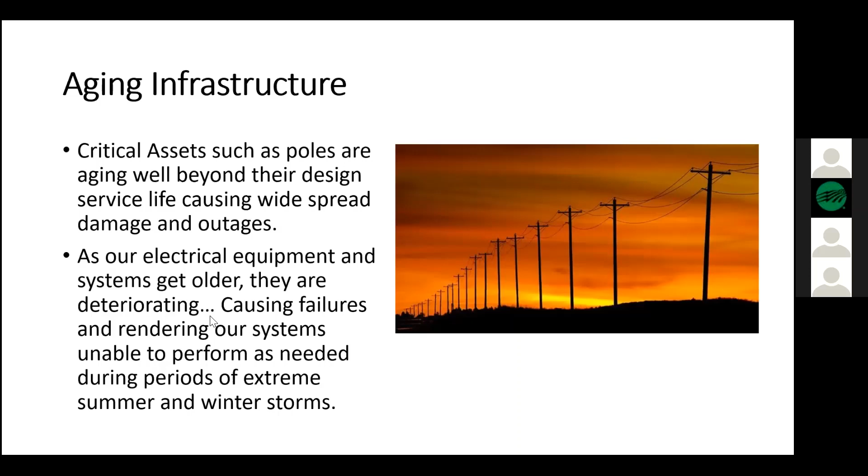As far as infrastructure hardening options, the NESC, that's basically where we go for some of the standards as far as the distribution and transmission systems. And these standards alone might not be the best for extreme weather situations.

So again, every year we hear about storms knocking out systems and big parts of systems and putting down utilities for a while. And just this past summer, we heard about those derecho storms that went through Iowa, and I believe it hit part of Illinois as well. And I know it took some time for them to rebuild some of those networks over there in Iowa. A lot of it's related to just these aging wood poles, and they just don't stand up to some of those storms.

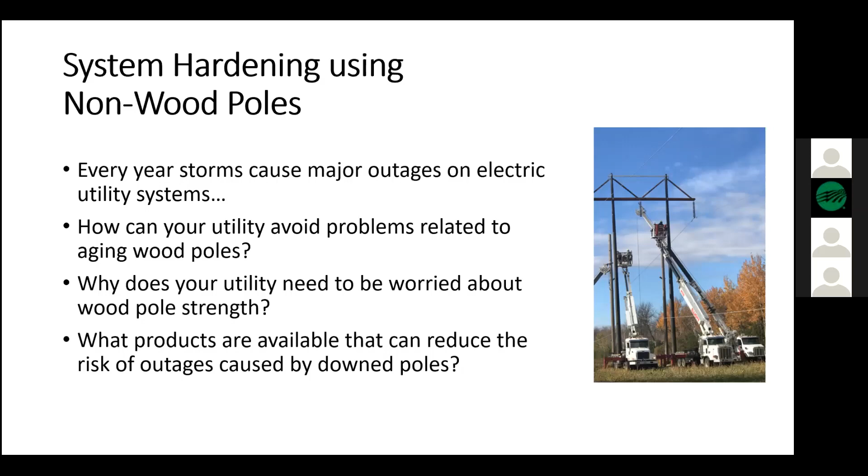So, I guess the common practice for upgrading poles is to look at stronger materials than wood. So you have the option for metal poles, concrete, or even composite poles. And of course, those materials also come at a premium to wood. With wood, you always got that first cost benefit, the lowest cost option, but it's also the option that's probably not going to last as long. It's going to require more maintenance.

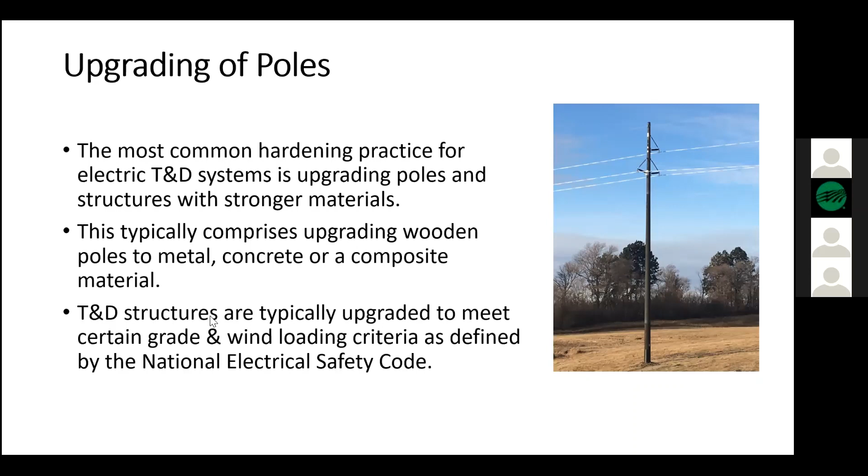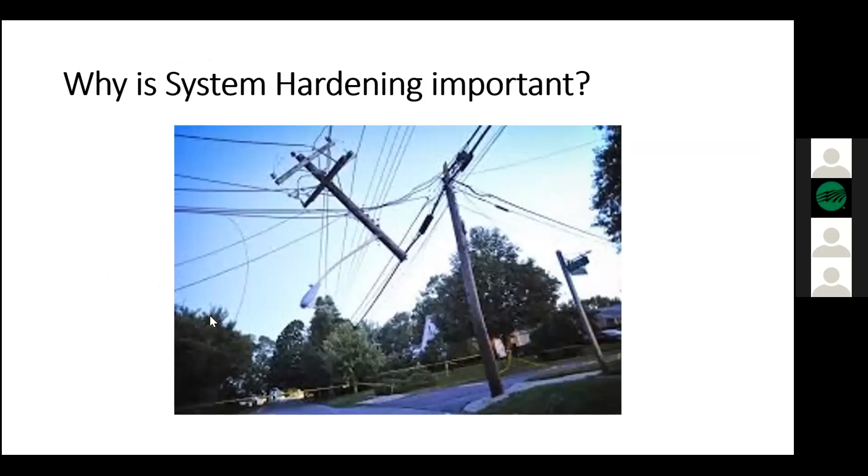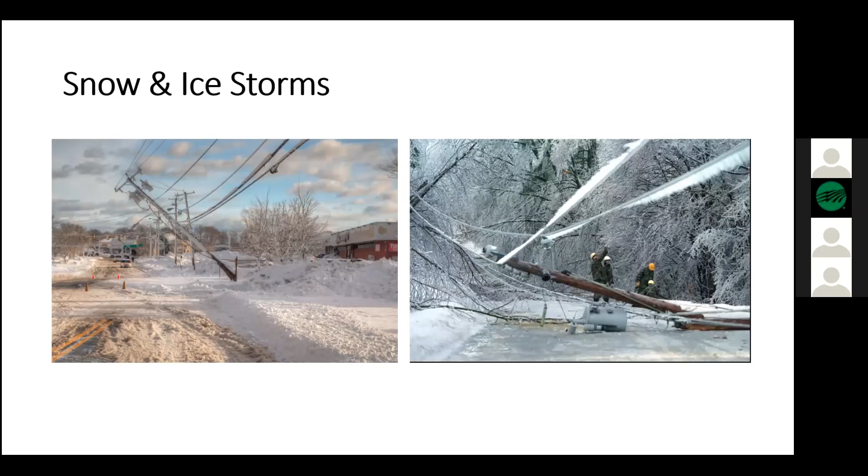So why is system or line hardening important? I'll show some photos in the next few slides of some windstorms and some damage. Snow and ice. Obviously, the ice on the lines can potentially take down poles. High wind storms, again, those derecho storms and tornadoes can take down poles. And of course, with wood poles, a lot of times you got that cascading effect when you got one pole go down, and then all of a sudden you have multiple poles go down.

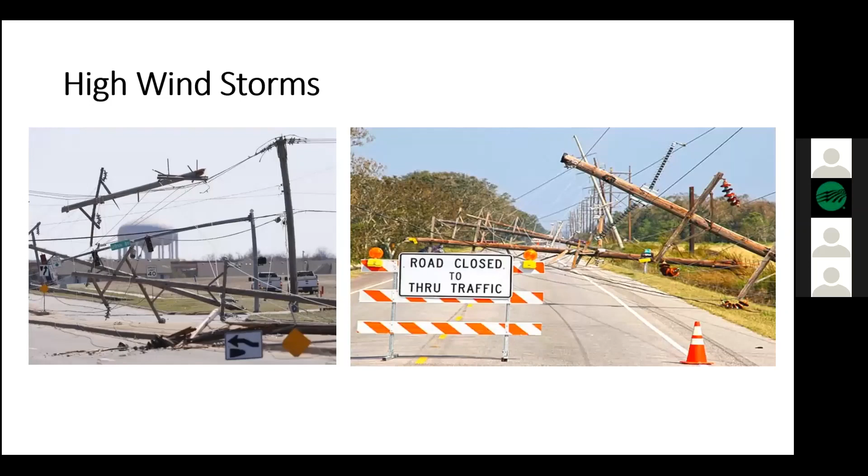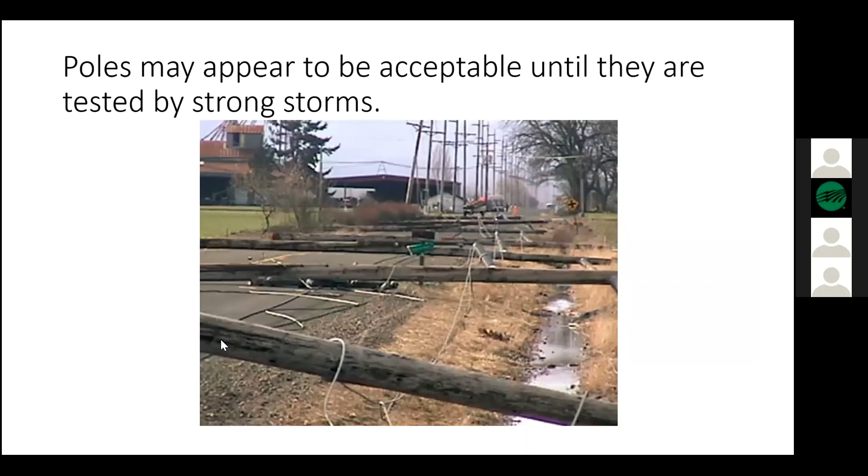Again, this is showing the cascading failures of some of these wood poles. A lot of times these storms will really test how strong your system is. You may think that you're doing your inspections and your wood poles are strong, but a good strong storm will come through and really put that system to the test, and many times take down the wood poles.

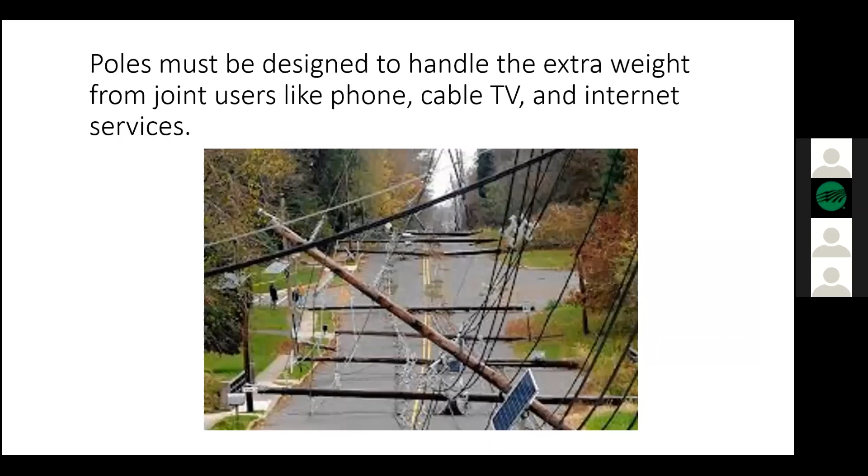And of course, poles nowadays are designed to hold not only electrical but also phone and cable TV as well as internet services. And when they go down, you're taking down a lot of the other services with it, making for a lot of upset customers.

And of course, when wood poles go down, when these are out of service, it's expensive. At times, if they're more than what your teams can handle, then you've got to bring in teams from neighboring counties or states to help you rebuild and put the system back together.

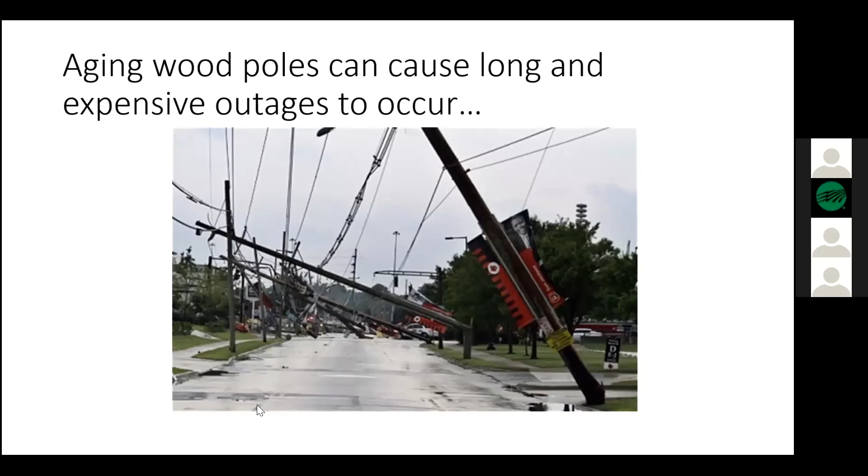And of course, with wood poles, you have to do more inspections and more frequent inspections. And sometimes you might put some Band-Aids on them just to make these poles last longer. But ultimately, they do need to be replaced by either another wood pole or a wood pole alternative.

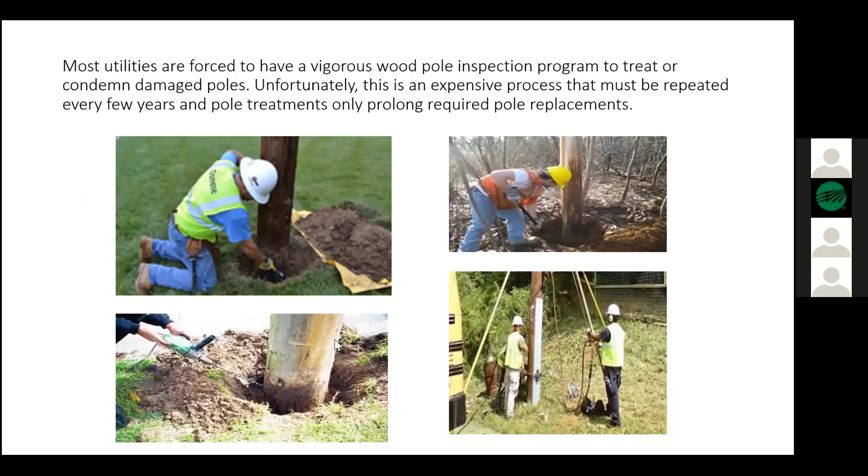So some of the alternatives: you've got your concrete poles, which aren't too common in the Midwest. We see more of those in Florida. You see a lot of concrete poles there. Texas, I believe, has quite a few concrete poles. Steel, which I'm sure you guys use around here. Fiberglass or composite poles. I've seen some of those in Illinois and Wisconsin, and I'm starting to hear more and more about composites.

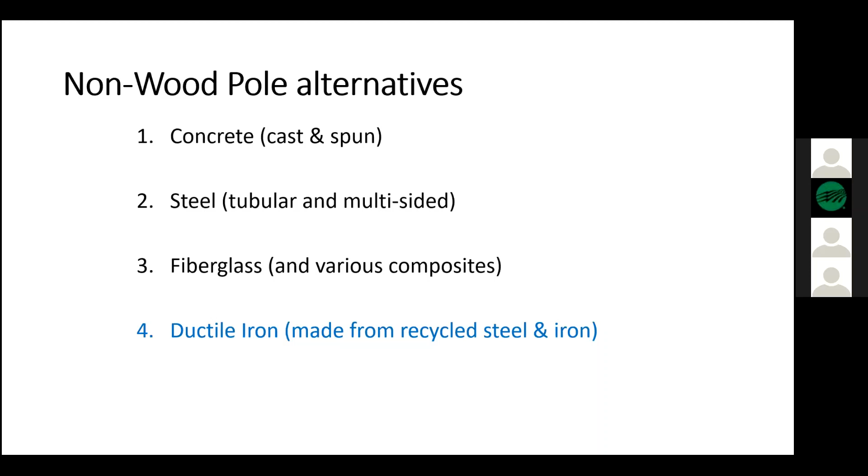But I'm going to focus on ductile iron, since that's what I'm most familiar with. So from here on out, I'm going to focus more on ductile iron as a non-wood pole alternative. All right, so I know you want to ask me, hey, Mark, what's ductile iron? So cast iron or gray iron has been around for hundreds of years, and it's a product that's well known for its durability and also its resistance to corrosion.

So ductile iron was developed shortly after World War II. I think it was 1947 when it came about. What they did was introduce a magnesium treatment into the process of casting or molding the iron. If you look at gray iron and ductile iron under a microscope, gray iron is made up of a lot of small flakes, and that's why it's such a brittle product. It's very robust, very durable. It's just brittle.

Ductile iron, what that magnesium did was it increased the tensile strength of the product. So it made the product so it can bend without breaking. As you look at ductile iron under a microscope, instead of seeing the flakes, you'll see these round little nodules.

So after ductile iron was developed... McWane has been around for 100 years, and this is a big year for McWane. It's our 100-year anniversary of being a company, and McWane is a sizable company in that we have 25 companies that make up McWane. We're in a lot of different businesses, but we're primarily known for our iron products. We make iron pipe and iron fittings and couplings and valves and fire suppression equipment and whatnot.

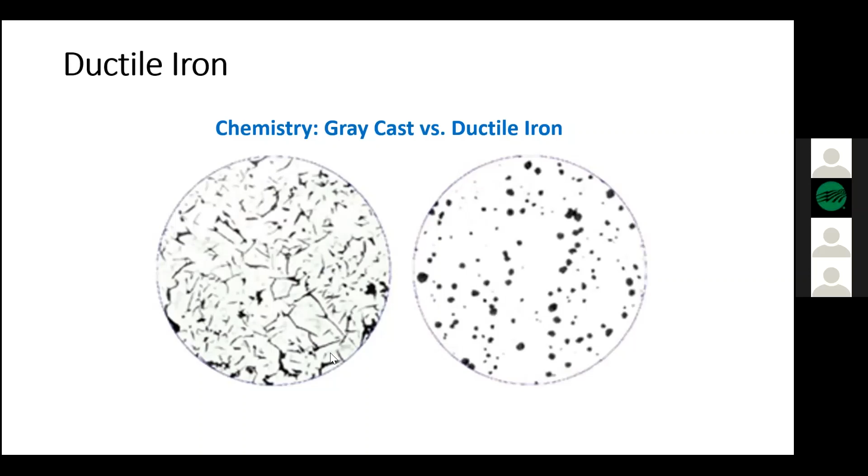And so when ductile iron was developed, we were actually one of the early integrators to take it on and put it in our factories. In the 50s, we swapped over a lot of our plants from the gray cast iron to the ductile iron process. So we've been working with it for a long time.

So some of the common uses for ductile iron: you've got a manhole cover there. You've got some of the hardware that's actually mounted onto utility poles. And we've got some automotive equipment like brake pads there, made out of ductile iron. We've got water pipe, as I mentioned. That's a big part of McWane's business; we make a lot of ductile iron water pipe, and then ductile iron fire hydrants. So again, iron, very robust. It's going to last a long time. It's just the drawback to the cast iron.

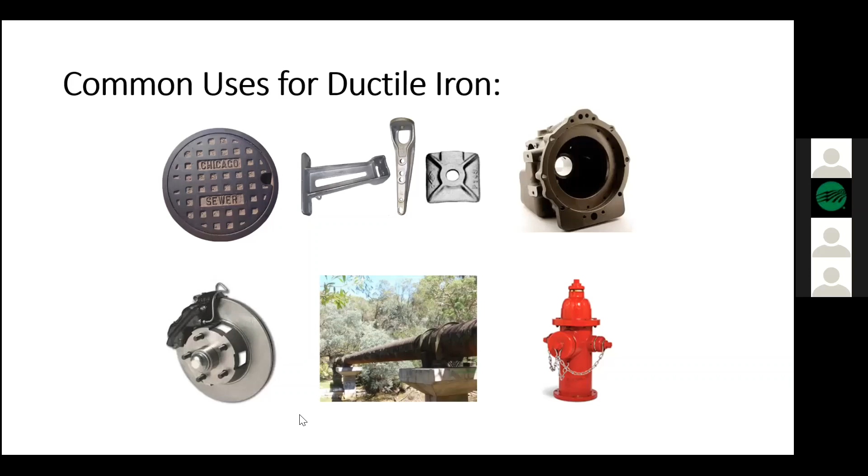It's brittle, whereas ductile iron is a little more flexible. So, benefits of ductile iron: again, it's corrosion resistance.

We did a salt fog test comparing ductile iron to Corten, or weathering steel, and both pieces of material were exposed to the salt fog for a period of 5 weeks. And as you can see, the Corten steel bubbled up and flaked off, whereas the ductile iron will oxidize and change color. Just like with our poles, when we ship them out of the plant they'll be kind of a grayish color, then over a period of about a year to 18 months they'll oxidize and turn more of a rusty color.

So the results of the salt fog test were that the steel lost 50% more material than the ductile iron over that period of time. So under the same conditions, ductile iron could potentially last twice as long as steel.

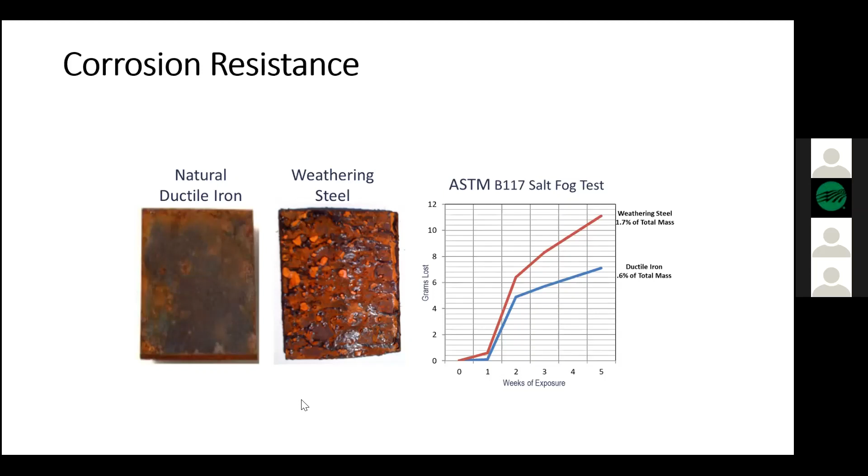Fire performance testing. I'm sure you've heard of some of the issues out on the left coast with forest fires. A couple of the big California utilities have had issues with forest fires, and there are lawsuits involved. They partnered with a company out there to do some fire performance testing, and they invited basically all of the alternative players in poles. So we sent a pole out there, and they did concrete, steel, composite, and in the end, ductile iron performed the best out of all the materials tested.

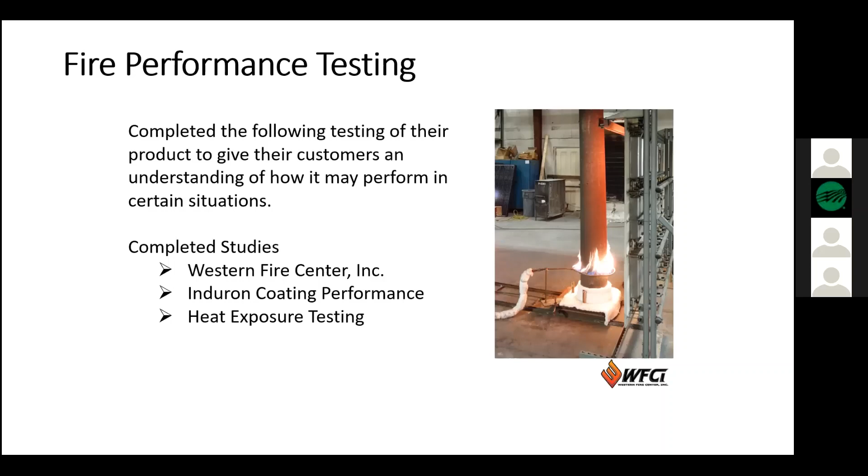If we have time at the very end, I do have a video showing the ductile iron poles being made. Again, these are molded at 2,600 degrees Fahrenheit, so they can withstand quite a bit of heat. And I'll comment too that one of those big California utilities is planning on using our poles in those high-risk wildfire areas.

Conductivity testing. We hear all the time about copper theft; it's an ongoing problem. We had one of our poles sent to AEP, I believe a 45-foot class 1, to have them do a conductivity test, and it tested to the equivalent resistance of a 4/0 copper ground.

We still recommend that you ground the ductile iron pole as you would a wood pole, because our ductile iron poles are considered wood pole equivalent. So however you ground those today, we recommend you continue that practice. But if the grounding or the copper is stolen, you still have that assurance that the pole is still conductive.

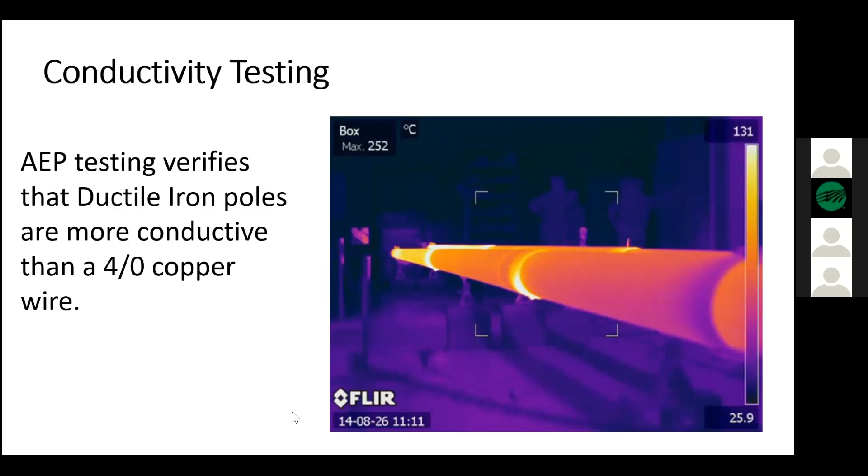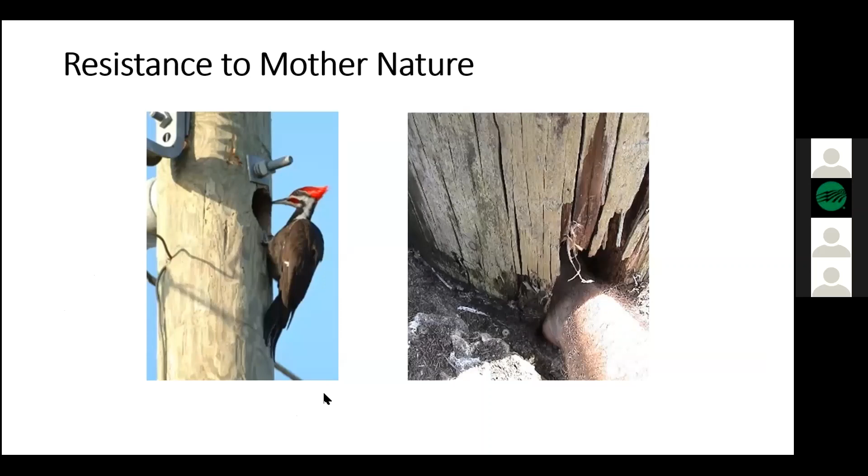All right, resistant to Mother Nature. With wood poles, in certain areas woodpeckers are always a threat, and in the picture on the right, ground rot. With ductile iron, these issues won't be a problem.

Sustainability. A lot of times those wood poles are treated, so you can't really recycle them; many times they become scrap. Our ductile iron poles are made with 95% recycled material, and they're 100% recyclable at the end of their lifespan.

We also put on a ceramic epoxy embedment coating. We coat the inside as well as the outside of the pole, and our standard is 1 foot above ground line. Of course, you can adjust that if you're in a bog area or something like that and want to go up 2, 3, 4 feet; we can apply more of that coating.

And with wood poles, some of those treatments can't be in an area where you have potable water, because those wood treatments will contaminate. Our ductile iron poles have been approved to be used in potable water locations.

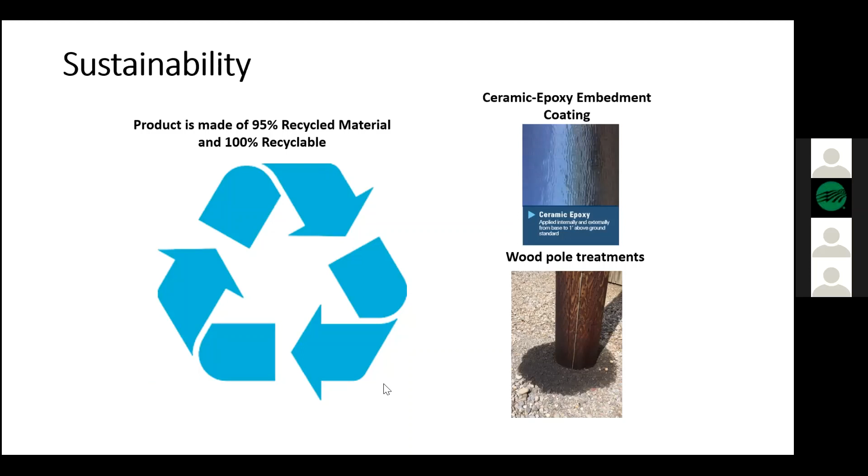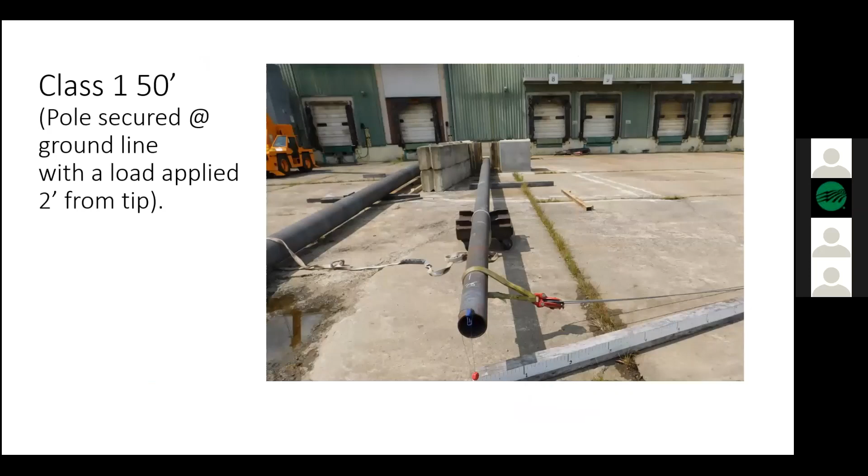So, 2.95 kips or 43 inches deflection. So this is where most wood poles are rated at, and this is where most of them at this point, or just beyond this point, they'll fail. So we tested to this point and then released it.

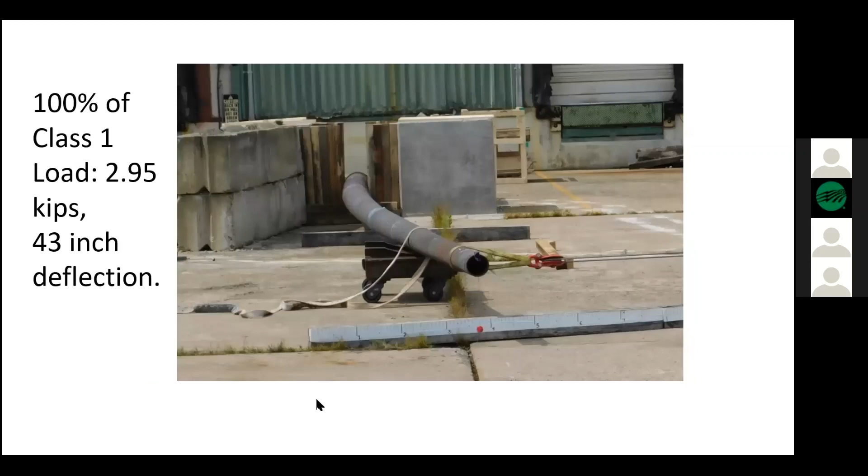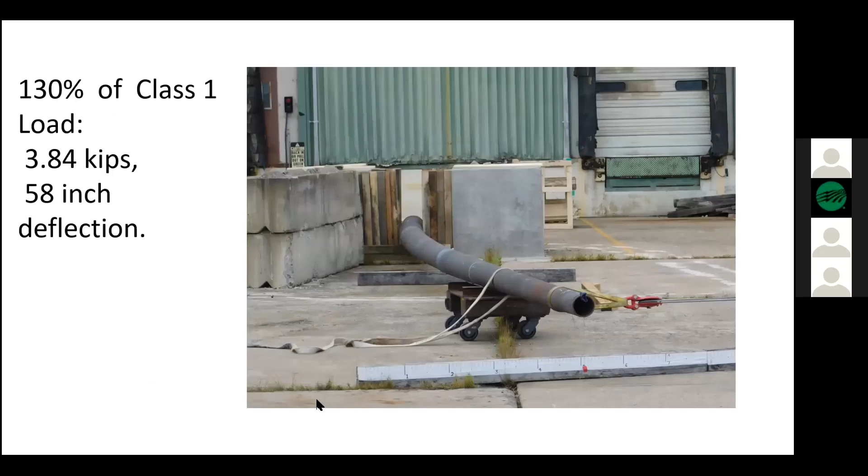And then we tested at 130% of class load, 3.84 kips and 58 inches of deflection. Again, no breakage. We released it back. And it wasn't until 173% of class load, or 103 inches of deflection, before that pole failed.

And I wasn't there for the test. I wasn't around at that time, but I asked, hey, how does a ductile iron pole fail? Does it splinter? So what was described to me is like if you have a raw carrot, you snap it. So it's a clean break when ductile iron does fail. So it was a clean break right near, I guess, where the ground line was. And again, 173% of class load.

We tested 5 different classes and heights of poles. And if anybody's interested, if you want to reach out to me, I'm more than willing to send you those test results, just so you get an idea of the tensile strength and flexibility of ductile iron compared to other products or wood, showing, being a wood pole equivalent, how much stronger ductile iron is by comparison.

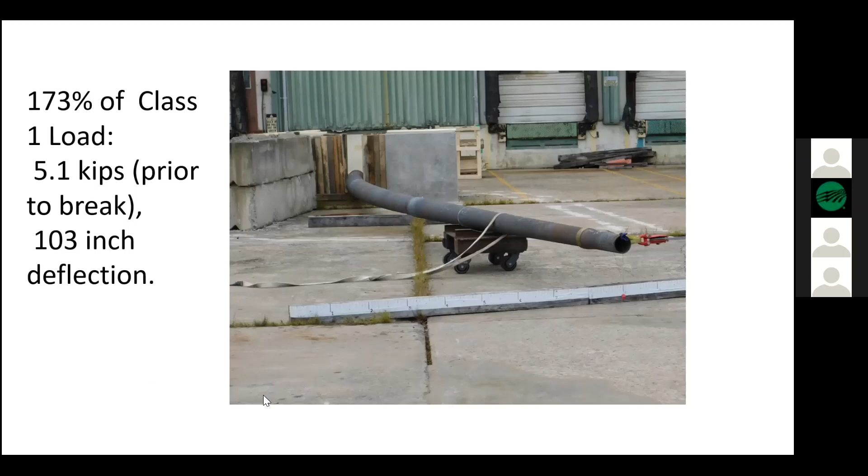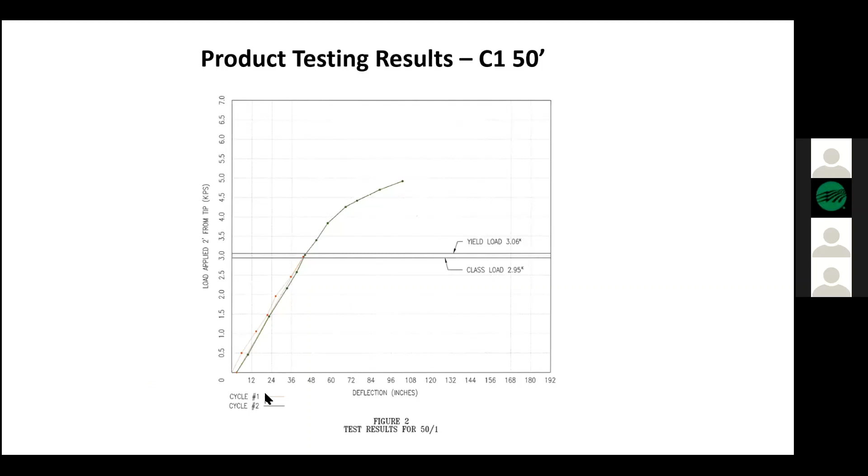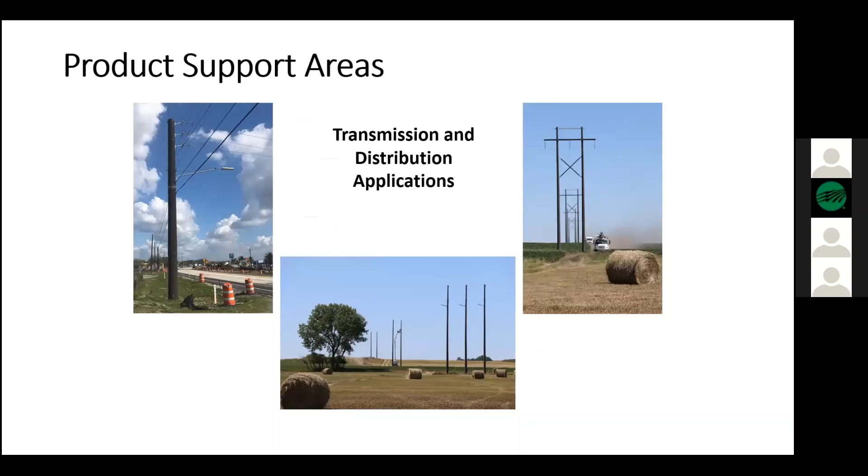So here's the chart showing the test results and how superior it is compared to where a wood pole could potentially fail. Product support areas. So we provide poles for distribution and transmission applications, and got some pretty photos there.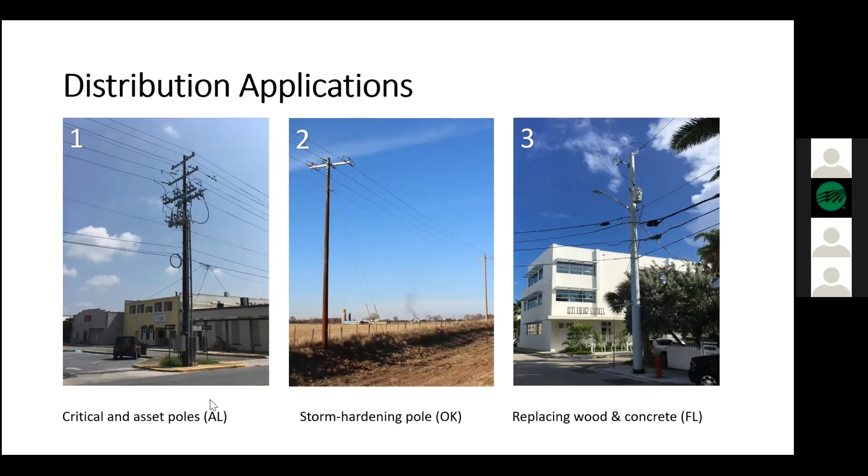And then the third photo there is a photo from the Florida Keys. They replaced a lot of concrete poles with ductile iron, and they had us paint them gray because they had so many concrete poles. They wanted to match some of the concrete poles that they had. So again, there's another success story I'll talk about later on in the presentation as it relates to the Florida Keys.

Transmission applications. So we got Idaho there, a 115 kV line. So here's an application where wildfire went through and wiped out a bunch of wood poles. And so these guys decided they weren't going to mess around with wood poles again, and they put in all ductile iron for that application. Middle photo there, near Las Vegas, they have an unguyed 80-foot H6 pole with 69 and 13 kV.

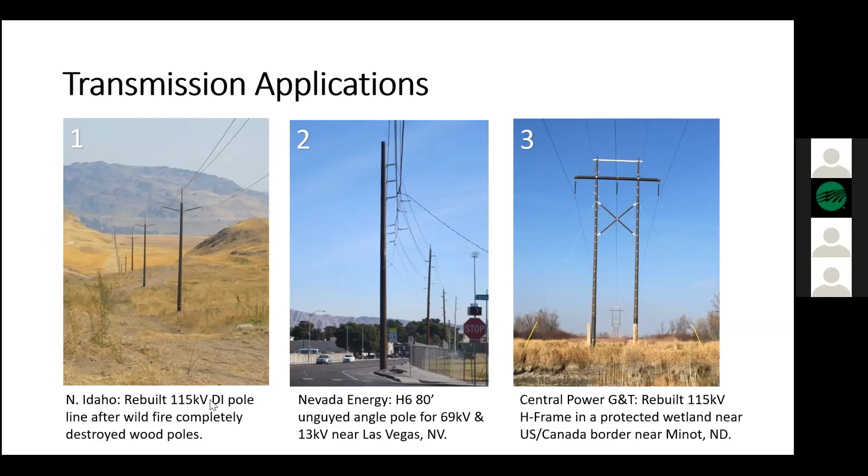And then that third photo there on the right, that's with Central Power. They're a part of the Touchstone network. They're up there in Minot, North Dakota, and they had a wetlands area where access was not very easy, and they didn't want to disturb it. So for them, it made a lot of sense to replace those H-frames, and they went with ductile iron for that whole run of line through there. Their thoughts with the ductile iron were a lot less maintenance, a lot less inspections, so they wouldn't have to go into that wetlands area.

In the field, we ship ductile iron poles out. If they're 70 foot or less, we'll ship them out in one piece. Just from our experience with shipping these poles, that's kind of the max length. If you get beyond that, then you have to have special permitting, and then the freight cost goes up quite a bit. So we recommend that any poles that are 75 foot or taller be shipped in two pieces. And the photos there show the guys in the field jacking the two sections together.

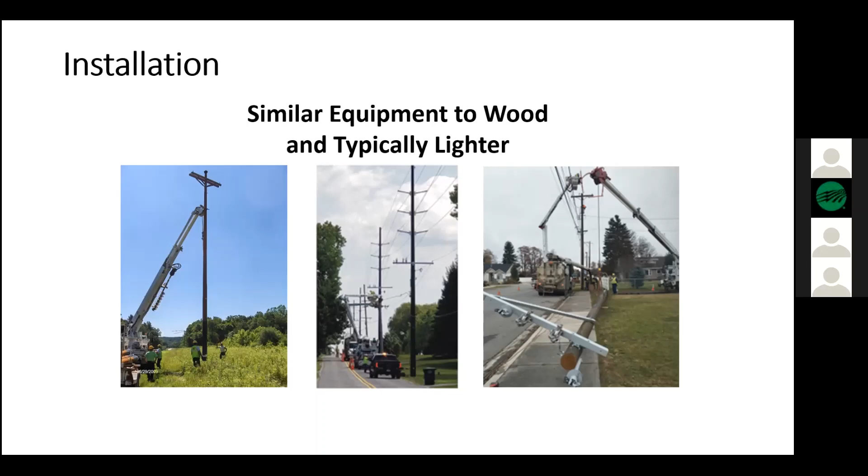Installation. It's much like the wood poles that many of your crews install today. Very similar equipment. Not much difference. I guess the only thing that comes to mind is instead of having a chain when you're hoisting up or lifting up these poles, we recommend maybe a nylon sling, just so you don't scratch up and scuff up the pole as much. But very, very similar to equipment used today. And actually, ductile iron poles, by comparison, are lighter than wood poles by 25–30%, depending on the class and the height of the pole.

So why ductile iron? With our poles, it's an engineered product. You're going to get that structural and dimensional consistency every time. And as I mentioned earlier with the test results, it's much stronger than wood. With ductile iron, your crews won't have to go back and retighten the hardware over time like you do with wood. And then we've got our pole library available in PLS and some of the other platforms, SPIDA and O-Calc, I believe, as well.

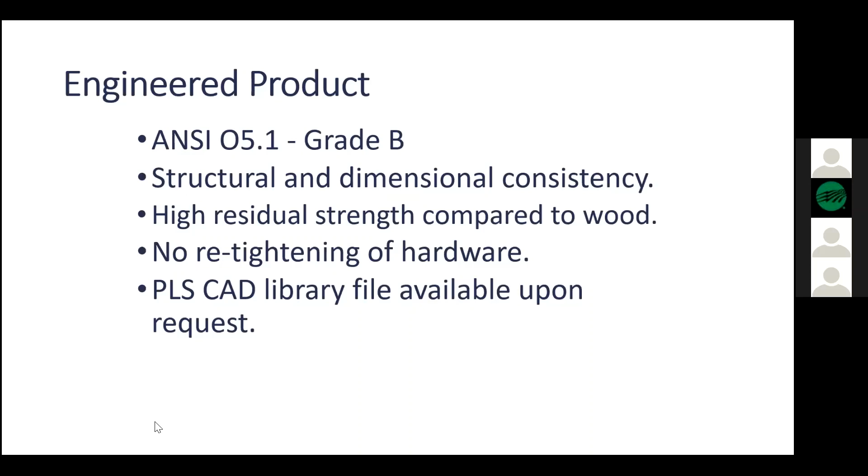Life cycle costs. That's one of the things that some of the co-ops look at when they evaluate whether ductile iron is good for that application. They'll look at maintenance costs and the life of wood poles versus ductile iron. So again, ductile iron is a superior product in these corrosive environments. A lot of these pilot projects we see are in wetland areas. And as I mentioned earlier, ductile iron is impervious to rot, insects, and woodpeckers.

Expected service life: we've only been making ductile iron poles since 2008, but we estimated the lifespan to be anywhere from 75 to 100 years. That's based on our experience with some of the other products we make, the iron pipe and iron valves. And it could be longer. We just thought that was a good number from a marketing standpoint. And typically that's going to be 2-3 times as long as many wood poles.

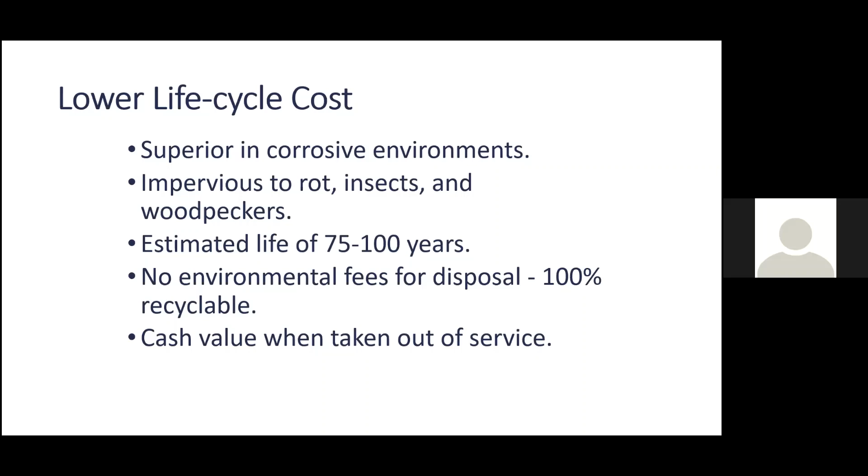And as I mentioned earlier, they are 100% recyclable. None of us are going to be around when these poles ultimately fail, but give us a call. We'll come pick them up and make them into new poles. And again, there's that cash value; you can sell the metal for scrap when these poles are taken out of service. Lineman friendly: as I mentioned earlier, it's a lot of the same equipment that your crews use today. A lot of the same hardware.

As far as field drilling, we would prefer to drill the holes for you in the factory, or at least the lion's share of them, so you don't have to worry about it. And we do that for most customers. They'll send us their drilling specs, and when we manufacture them, we'll drill them to those specs. But of course, there's always that occasion where a hole was missed, or we need to mount something we didn't think about initially. With ductile iron, if you use the bits we recommend, you should be able to drill it out in about 30 seconds to a minute.

As I mentioned earlier, ductile iron is lighter than wood by about 25 to 30, 40%. We are heavier than steel by comparison, probably 15 to 25% heavier, and that has to do with wall thickness. Our ductile iron wall thickness is thicker compared to steel. And again, our poles are self-grounded. You would not have to ground them, but as I mentioned earlier, I would recommend that you ground them as you would today with your wood poles.

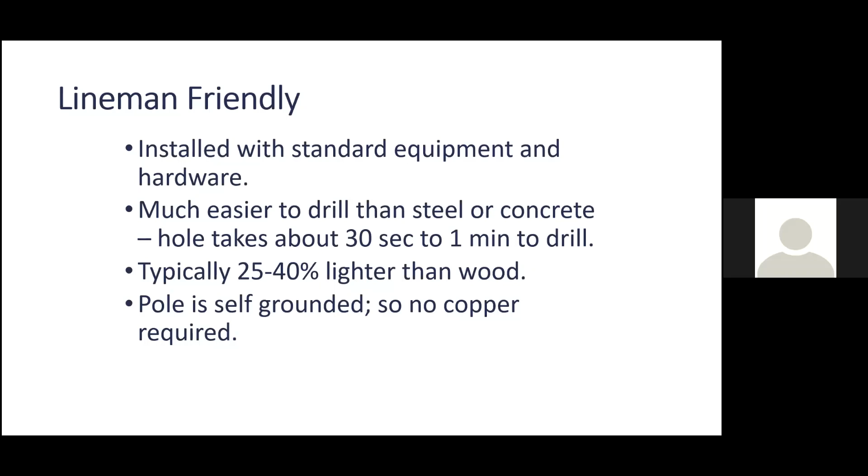All right, success stories. As mentioned earlier, Florida Keys.

Some of you recall 2017 Hurricane Irma. I guess the Keys have been largely protected, it seems like, from hurricanes for years. They seem to always dodge these hurricanes, but we finally caught up with them. And in 2017, Irma came through and wiped out quite a few wood and concrete poles.

And prior to that, Florida Keys had already started to use some of our ductile iron poles as they replaced some wood and concrete poles, and their crews loved them. They liked the fact, at least compared to concrete, how much lighter they were, how much easier they were to install. So if you guys want to take a field trip, I recommend Florida Keys. You'll see a lot of our ductile iron poles down in the area.

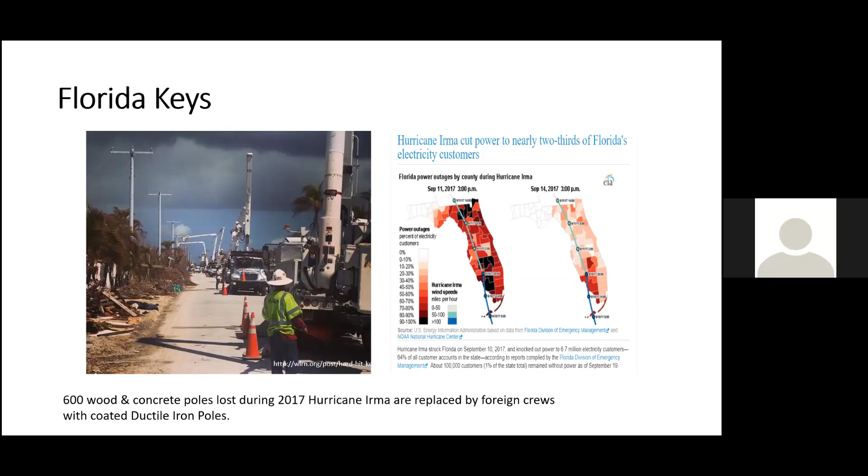Kiamichi Electric Co-op down in Oklahoma. They've had some problems with ice storms over the years. 2002, they lost 16,000 wood poles. And then 2013, they had another ice storm that wiped out a bunch of wood poles. Then they worked with a consulting engineer to come up with a way to strengthen their system. He recommended basically using ductile iron poles in conjunction with wood poles. So they had basically 4 ductile iron poles per mile mixed in with the wood poles.

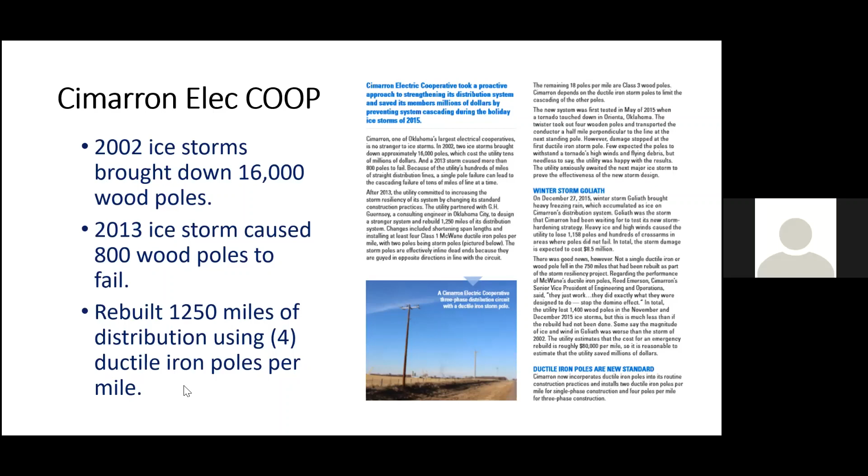And at the time they were building this line, another ice storm came through, and I think that was 2015. Again, it knocked out a lot of their wood poles, but the section that they had already started working on with the storm hardening project, they didn't lose a single pole. So they've been very satisfied with the end result of their storm hardening initiative using the ductile iron in conjunction with the wood poles.

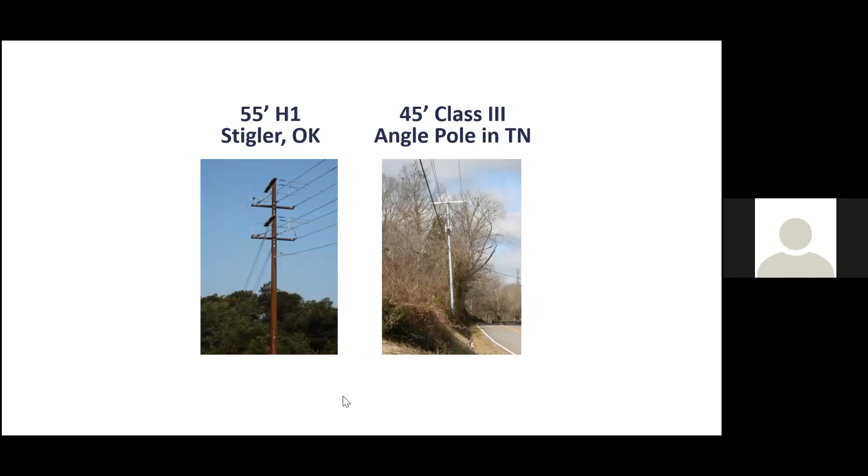Some 70-foot class 3 communication tower there in Nebraska. And we got some poles there in San Angelo, Texas, as well as the coated poles in the Keys. The reason they coated them, I guess two reasons. Being more of a saltwater type environment, they were concerned that saltwater air might shorten the lifespan of the pole. Plus they wanted it to look like the concrete pole, so they coated. So yeah, they most likely added life to that pole by coating it.

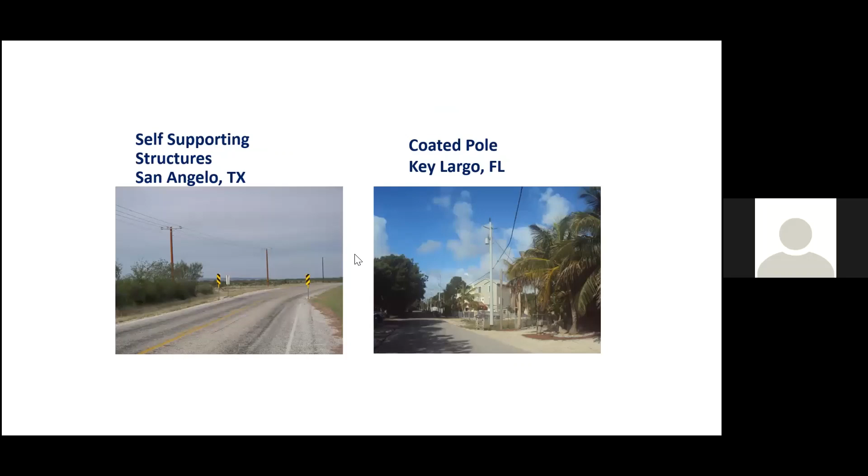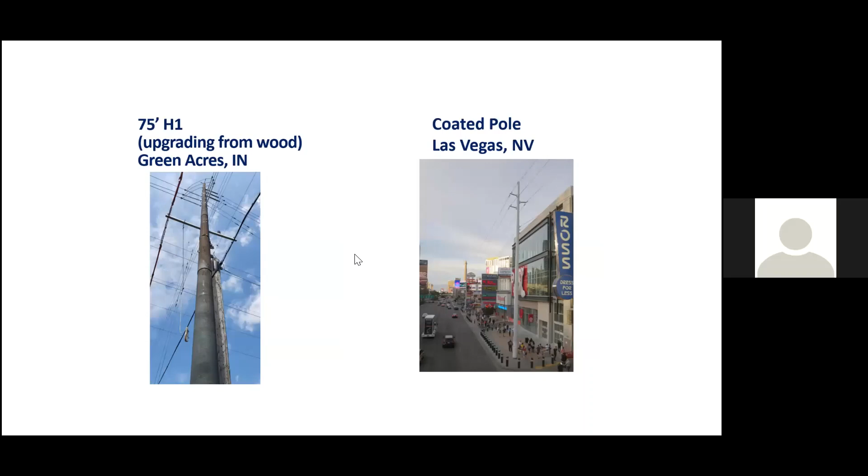And then 75-foot H1 there in Indiana, upgrading from a wood pole. And then Las Vegas, we got a nice coated pole right along the Las Vegas Strip. I believe that is right across the street from New York Casino. So I guess that brings me to the end of my presentation. It looks like I have time, so I'm going to jump ahead one slide here. I got this little video that shows our poles being made, and then I can back up if we have questions.

So this is our plant in Provo, Utah. A quick thing about McWane. The poles division, we have two locations. We got a plant in Coshocton, Ohio, which is about 70 miles northeast of Columbus. And then we have Provo, Utah, which is about 45 minutes south of Salt Lake. Both plants actually produce water pipe as well, which is the foundry side of the business. And then the poles plants are across the street, where we assemble the sections into utility poles.

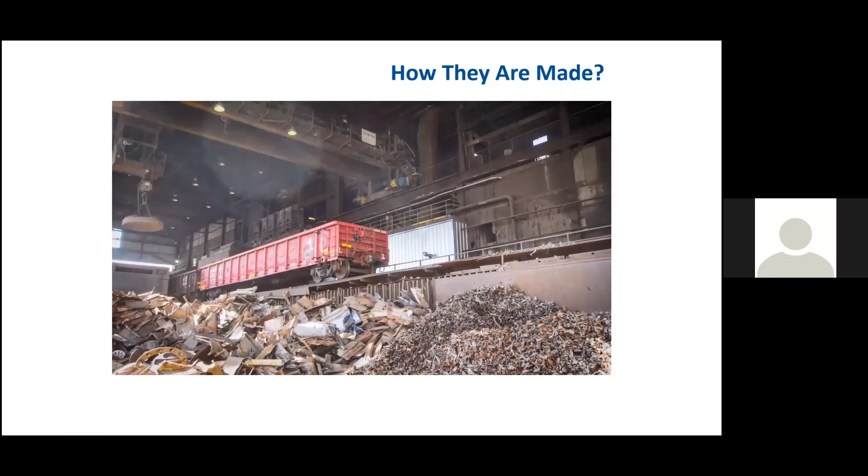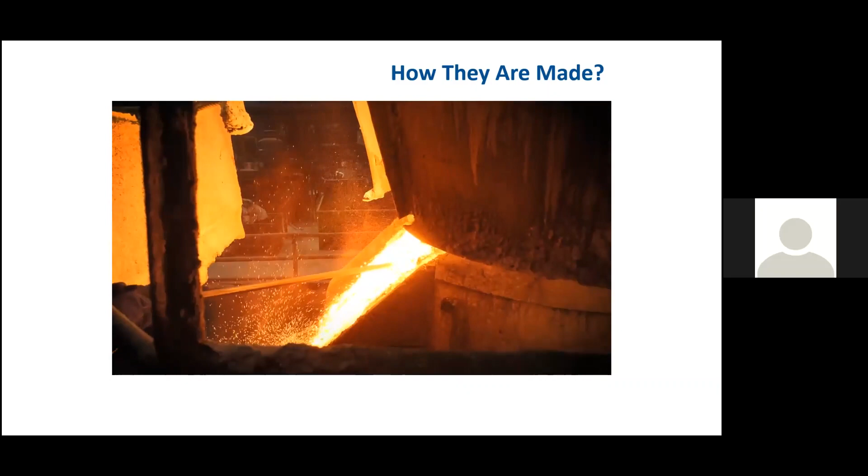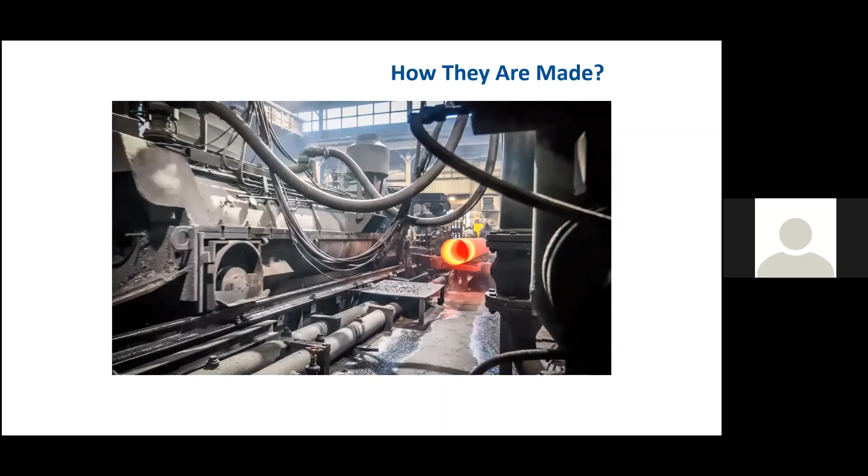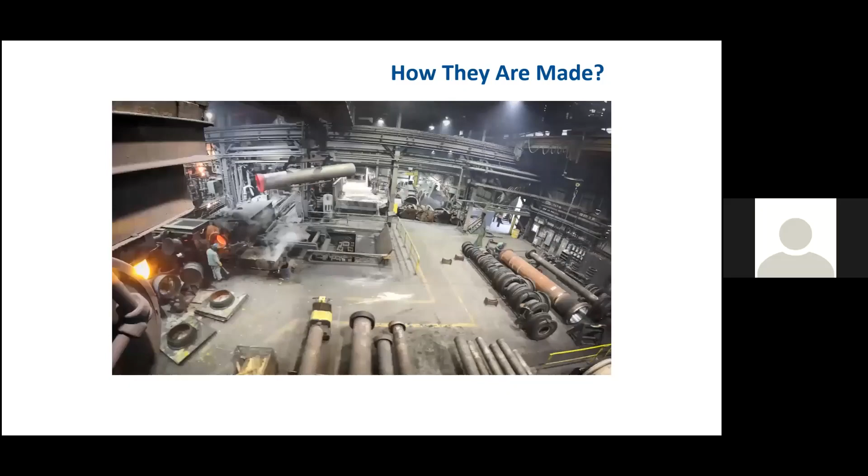So I will go ahead, and this goes pretty quick, just to give you an idea how these are made. All scrap metal. Our pole sections are centrifugally cast, and that molten iron is probably about 2,600 degrees Fahrenheit. We make the pole sections. They're basically 18-foot sections, and then we'll cut the flange end off. Typically we have about 15 feet when we start building them into poles.

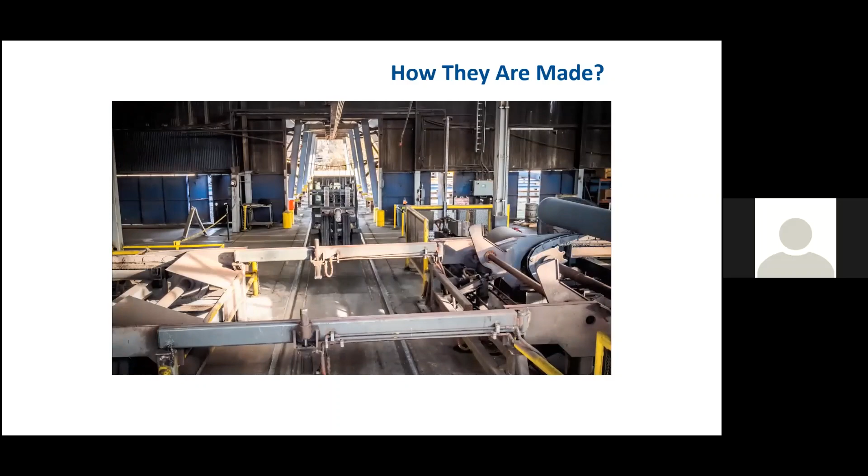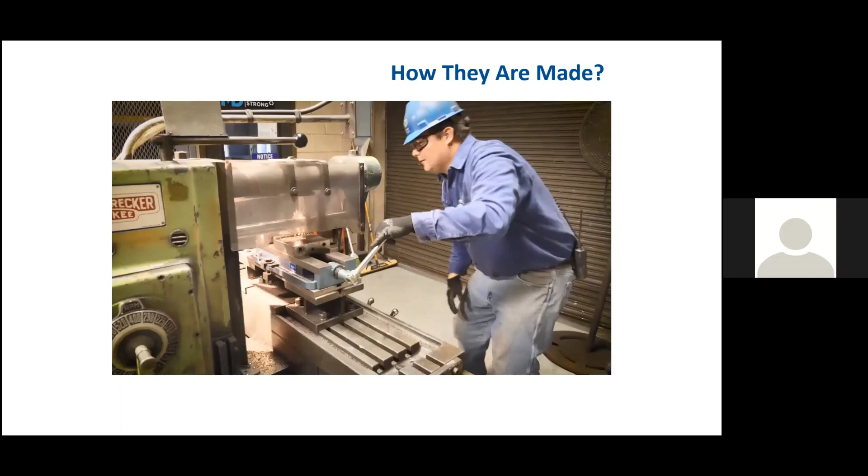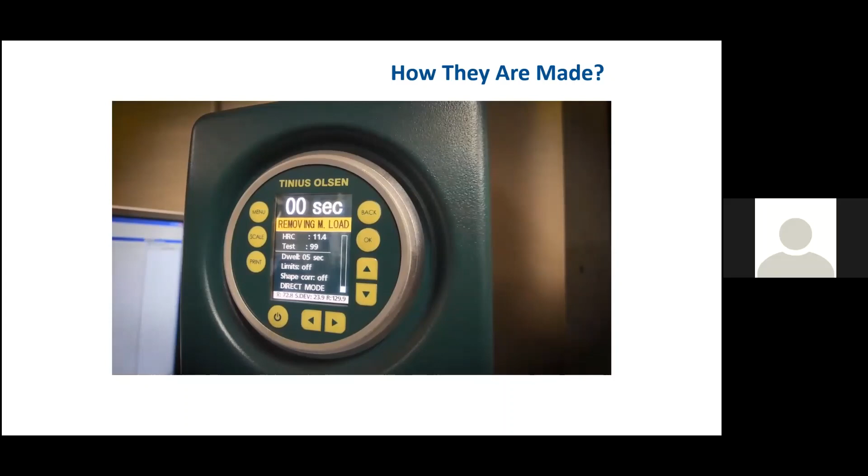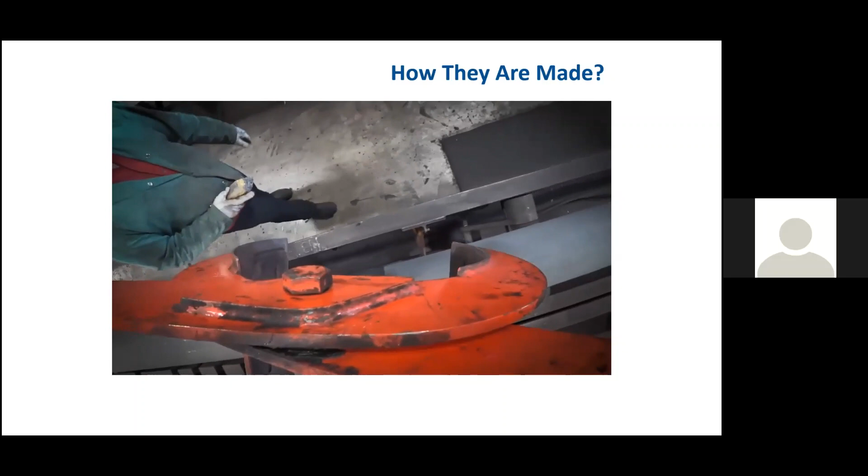Cutting off the flange section there. So now they're at the pole side of the business. Checking hardness and different tests we do out of each lot that we mold, just to make sure that they meet our specs. We'll press the sections together using a 50-ton press, and then we'll pin it.

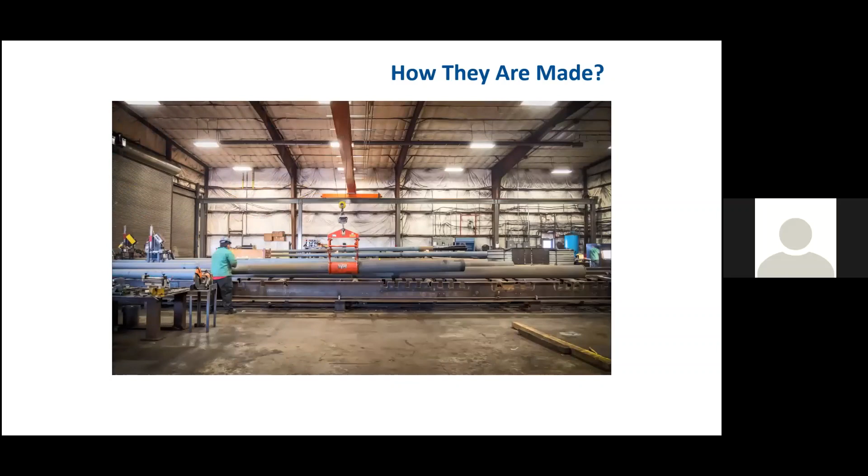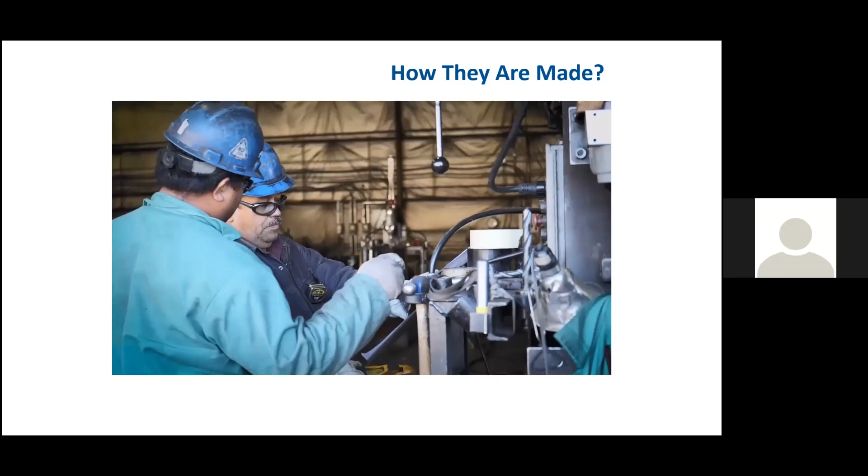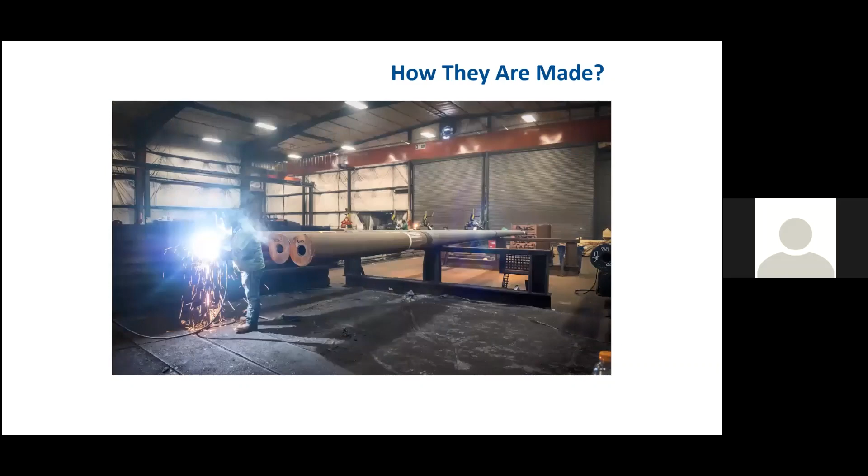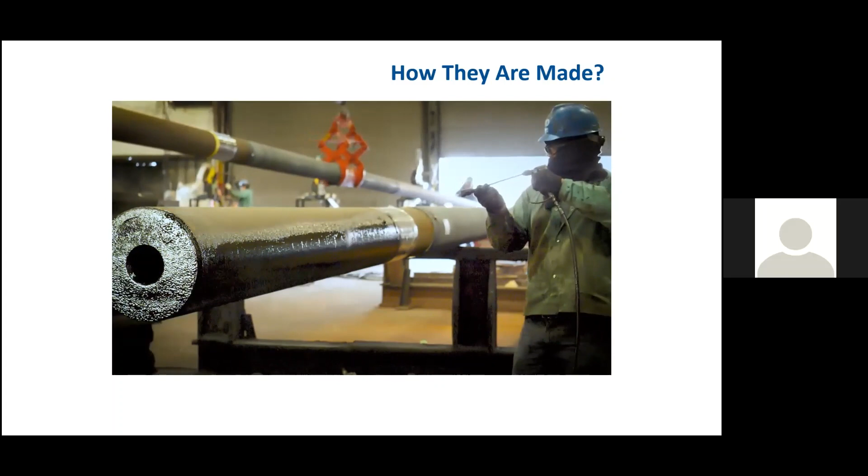Drilling out the holes per customer specifications. Actually, this process has improved. This video is a couple years old. It's more automated today. Spot welding on the base plate. Applying the embed coating, inside and outside the pole. Stack them on the wood dunnage for shipping.

All right, I'll stop there. Any questions from anybody?

Mark, I gotta tell you, I'm a sucker for that show, How It's Made, so I appreciate that. That was a very interesting video. Although I am kind of curious what the temperature of that shop is in July. Oh gosh, yeah. Try not to do too many tours that time of year because we'll probably have people pass out. Yeah.